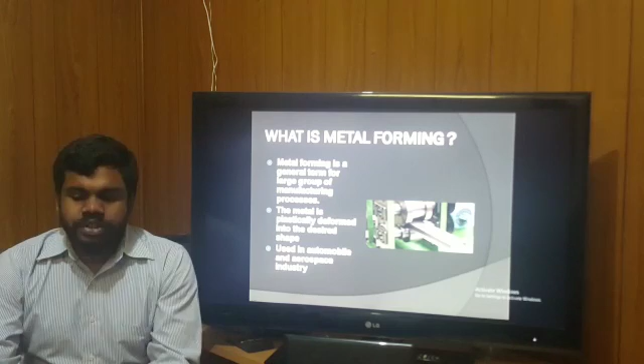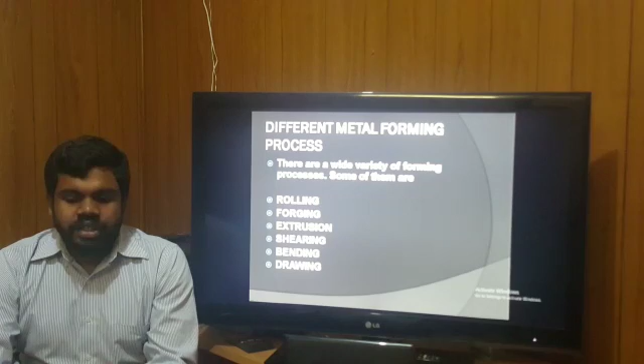There are a wide variety of metal forming processes. Some of the major processes are rolling, forging, extrusion, shearing, bending, and drawing. One of the major problems that we face during metal forming is the friction that occurs between the tool and the workpiece, which results in adhesion and wear occurring in the piece. So in order to avoid this, we use lubricants. The lubricants are added to the tool and work interface in all metal forming, which in turn reduces the wear rate and the adhesion that occurs between the surfaces.

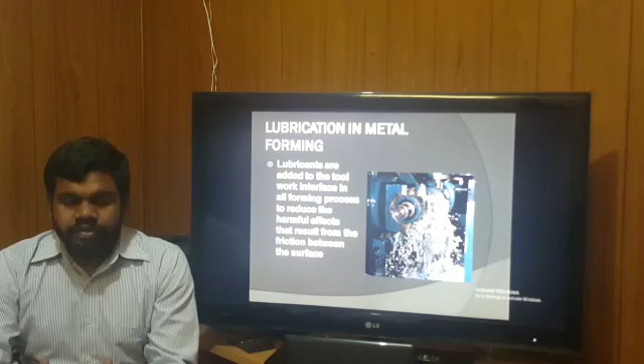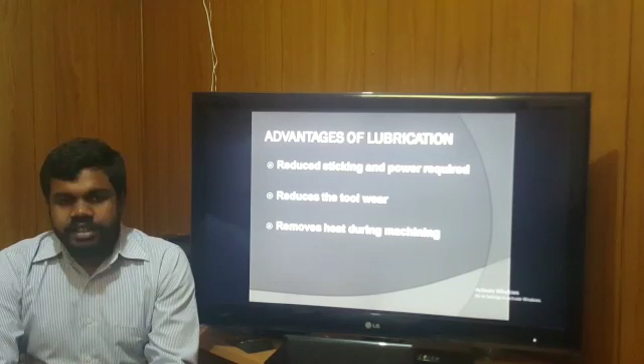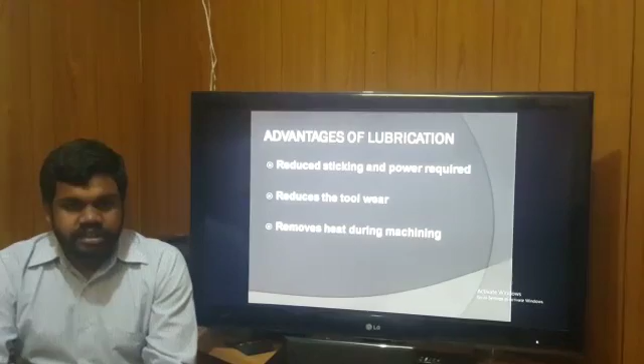The major advantages that the lubricants provide us are: it reduces the sticking that occurs between the tool and the workpiece. Then the power required will be very less. That is, if lubricants are used, the amount of power that we have to provide to push the metal piece is less. The tool wear is reduced. If the tool wear is high, we have to change the tool piece after each cycle. Next is that the heat during the machining process is reduced. If the heat increases, the shape of the metal in turn changes, which does not give us the required shape.

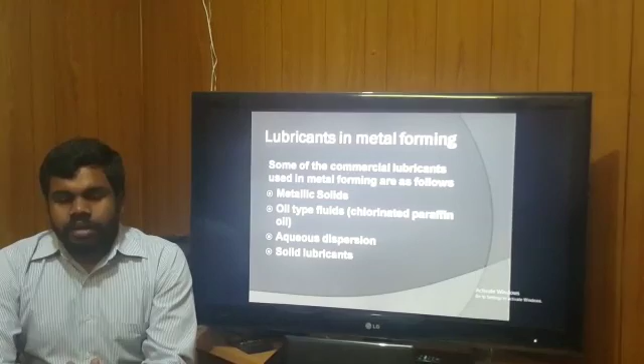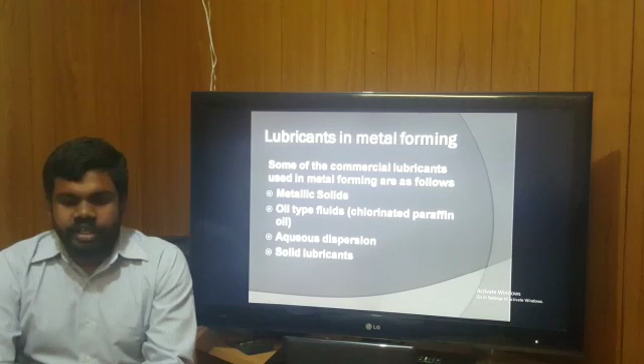A wide range of lubricants are used during metal forming. Some of the major lubricants are metallic solids, oil type fluids, for example chlorinated paraffin oil, aqueous dispersion solids, and solid lubricants. The lubricants used right now have many disadvantages. They are not environmentally friendly. Many chemicals like chlorine, sulfur, phosphorus, etc. are used in this process, so this is not eco-friendly. Although lubricants are used, the efficiency that we get from this process is very low. The wear rate from the commercial lubricants being used right now is very high, and there's need for replenishment. That is, after every cycle, the lubricants have to be replenished. It does not stay.

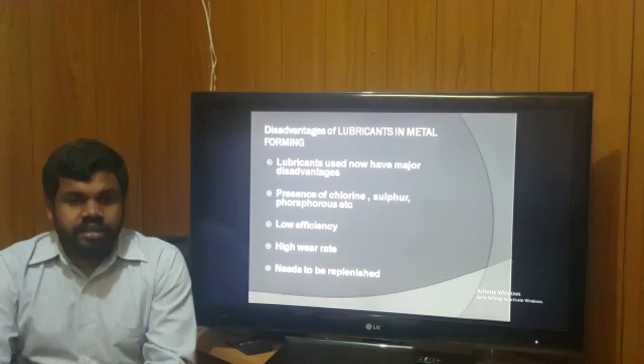So this led me into thinking and brought me an idea: why can't we use a lubricant that is eco-friendly and can be used for a repeated number of cycles? And I came to the conclusion, why can't we use coconut oil as a lubricant with some additives added to it.

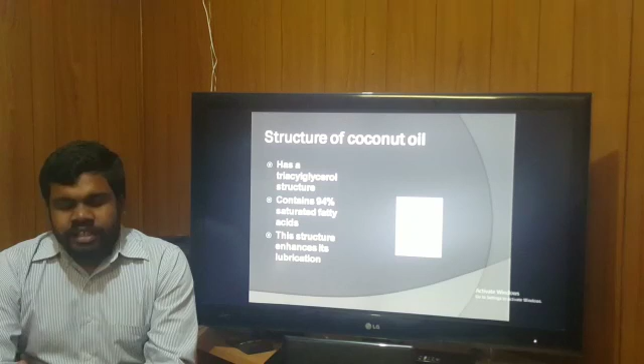So now I'll give you a general idea about coconut oil. Coconut oil is basically a type of vegetable oil. It's available in large quantities in the southern states of India. Basically, coconut oil is 51% lauric acid, and although it's an acid, it's totally environmentally friendly. The coconut oil has a triacylglycerol structure. It consists of 94% saturated fatty acids. So this is a major advantage, and this enhances the lubrication properties of coconut oil.

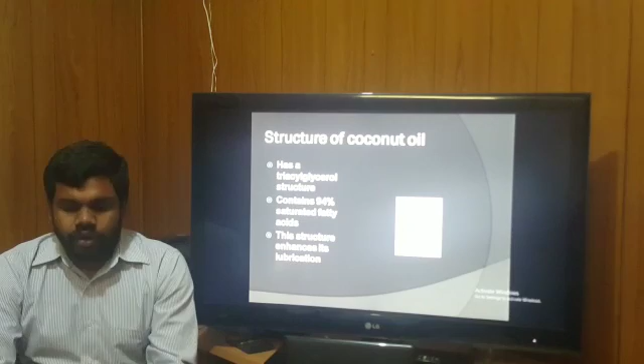The major properties of coconut oil are, first one, its viscosity index. The viscosity index of coconut oil is high. That is, at high temperatures, the viscosity of coconut oil does not decrease. So this in turn, it remains thick even during the forming process.

The next is the flash point. Flash point, in general, is the temperature at which the oil might vaporize. So for coconut oil, it's high. So in general, the flash point is high. The oxidation stability: coconut oil has a low oxidation stability, so if oxidative inhibitors are added to it, its stability can be increased.

Pour point. Pour point is the lowest temperature at which a liquid can flow, and for coconut oil, it's very low. So this is an added advantage for coconut oil. The anti-wear properties of coconut oil are also very high. So all these properties are advantages for coconut oil being used as a lubricant.

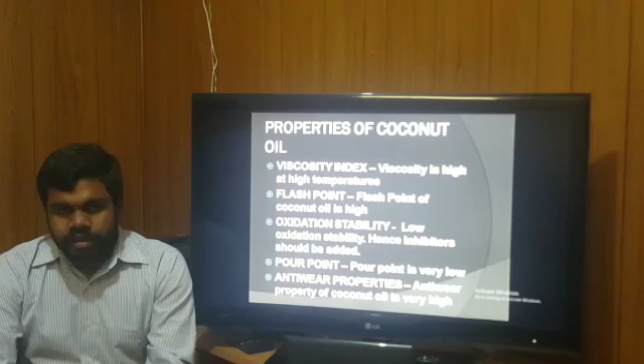In the previous studies conducted, it was found that this oil is used in a large number of two-stroke engines in different states of India. So Mr. Jayadas conducted a test on a 4-ball tester using the additive zinc dialkyl dithiophosphate. The major variants that were tested were the coefficient of friction and the wear that occurs to the tool piece.

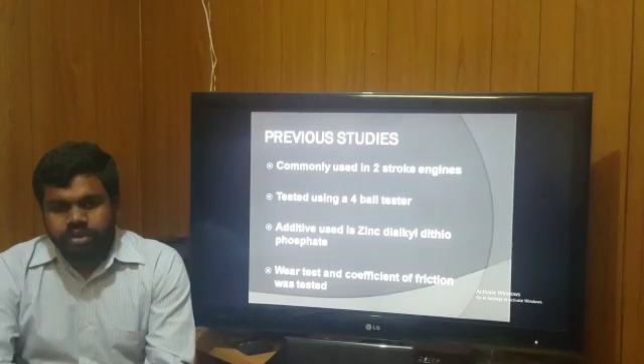So the advantages that they found is that the coefficient of friction improved a great deal. The wear scar diameter was reduced when the additive was added, but it had a major disadvantage. That is, the wear scar diameter reduces only when the additive is added to it.

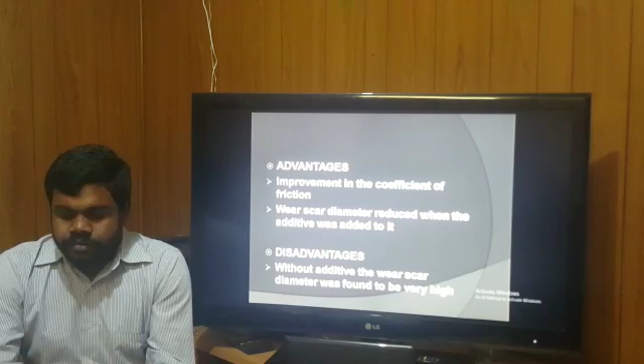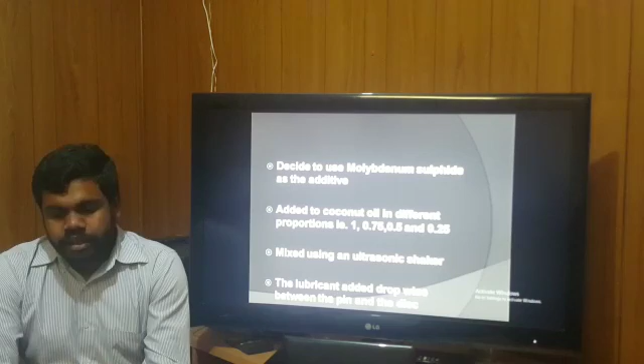So after the analysis, it was decided that we use molybdenum sulfide as the additive. So molybdenum sulfide was added in different quantities, that is 1, 0.75, 0.5 and 0.25. Then these quantities were mixed in different proportions using an ultrasonic shaker. The lubricant was added dropwise between the pin and the disc.

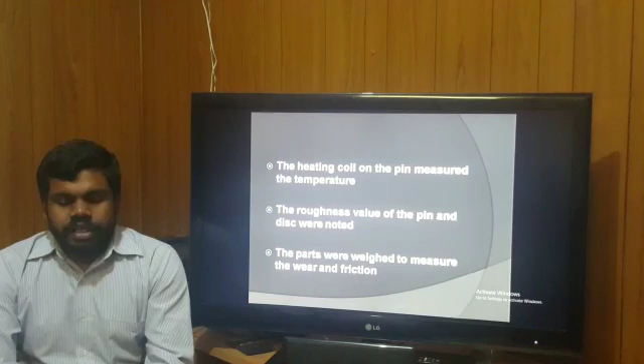The pin had a heating coil which would measure the temperature. The roughness value of the pin and the disc were noted. The weight of the parts was measured so that we can know the wear, and so in turn we can calculate the friction that occurs.

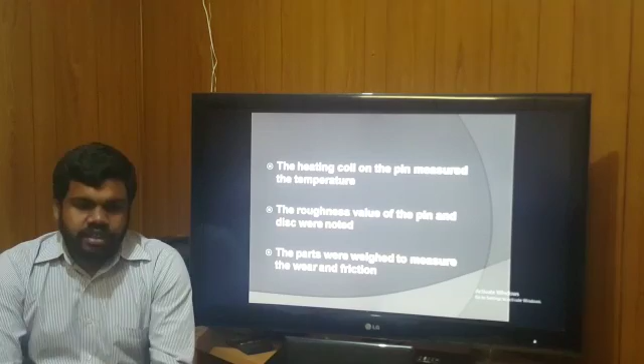From the results obtained, we found that the roughness value of the pin varied from 0.27 to 0.32 micrometer, and the disc varied from 0.15 to 0.16 micrometer. The coefficient of friction was reduced a great deal when the temperature was 75 degrees Celsius. And from the results, we found that the optimum composition of molybdenum sulfide was 0.53. The wear rate reached an acceptable value of 0.883.

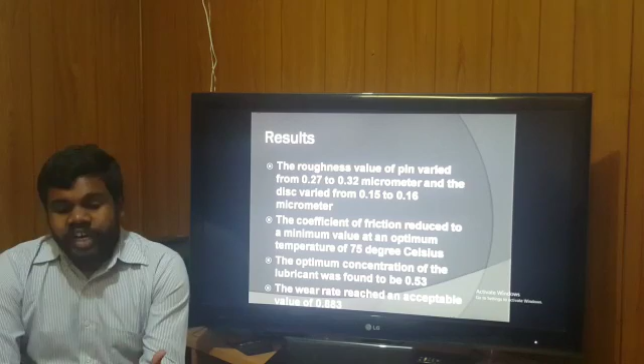And hence we can conclude that molybdenum sulfide at an ideal concentration of 0.53 is an ideal lubricant additive that can be used along with coconut oil. And this in turn proves that coconut oil is one of the best lubricants that is eco-friendly and environmentally friendly.

But there were some limitations. Even though the added molybdenum sulfide reduced the friction and the wear, if the concentration of molybdenum sulfide varied plus or minus, then the wear rate and the friction completely damage the workpiece. When it is kept stationary for some time, the coconut oil has a tendency to settle down, and so this makes it unsuitable for certain applications.

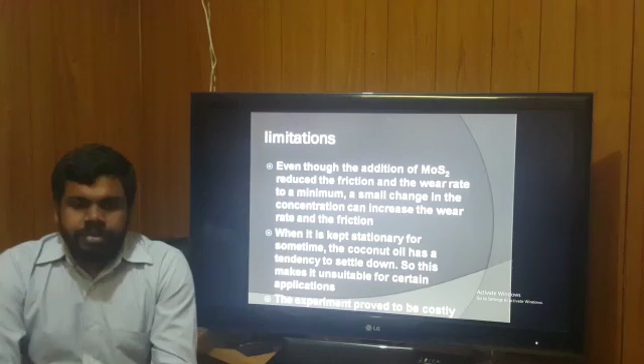And finally, the experiment proved to be a little costly, so new research has to be conducted which can help in reducing the cost. Thank you.